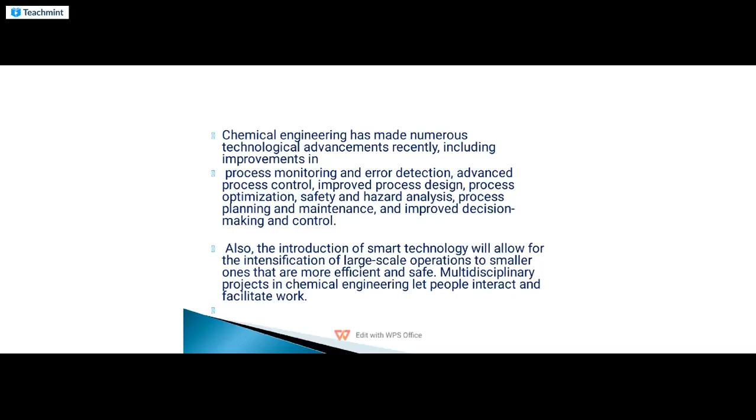We are describing new technology, like large scale operations, not only small scale, but also large scale operations with multi-disciplinary projects. There are a lot of advancements in today's technology - basic softwares like Aspen, Aspen Plus, DWSIM, CFD (Computational Fluid Dynamics), ChemCAD, which have more impact on the next generation, especially in chemical and process industry.

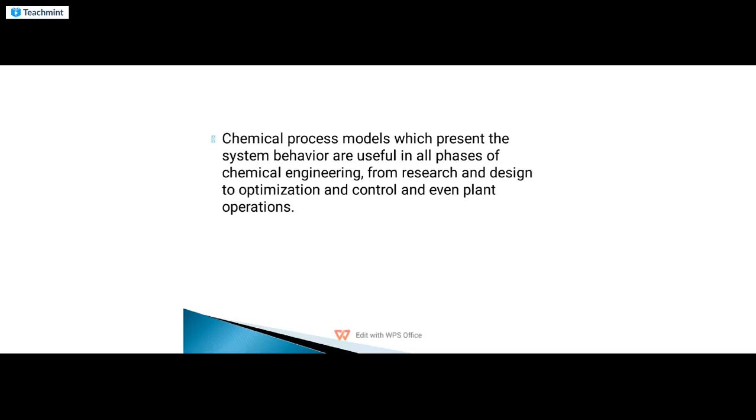So chemical process models also present the system behavior in all phases of chemical engineering, including research, design, optimization, control, and even plant operations.

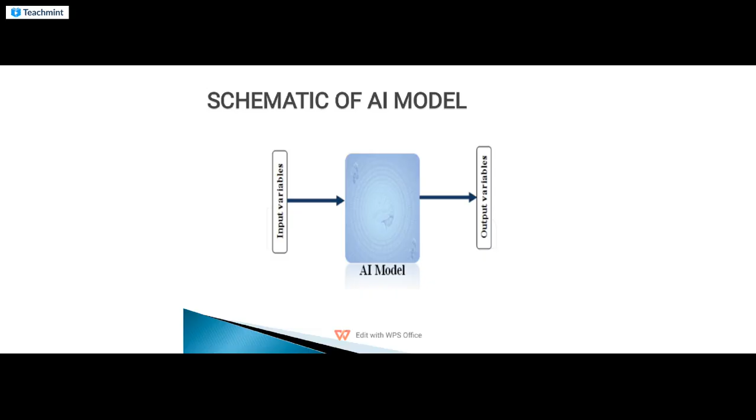Next, there are two types of modeling available in chemical engineering: mechanistic approach, and data-driven approaches like ANN (artificial neural network) and fuzzy logic models. In the mechanistic approach, the fundamentals are physical-chemical laws such as conservation laws, forming the basis of the model, with algebraic equations for mass, energy, and momentum balances. So we are discussing these types of modeling in chemical engineering.

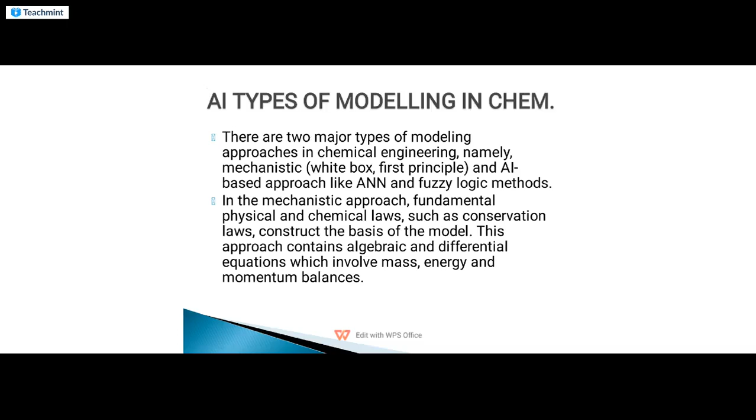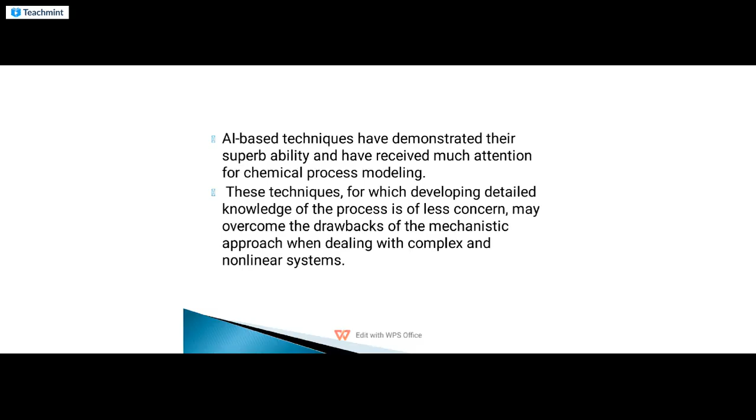The most common method in chemical engineering is ANN (artificial neural network) and fuzzy logic, which are sometimes hybridized with evolutionary algorithms. Apart from ANN, we have fuzzy logic methods and their hybrid schemes, which are network-based, like ANFIS - Adaptive Neuro-Fuzzy Inference System - implemented in the framework of adaptive networks, also applied for modeling purposes in chemical engineering.

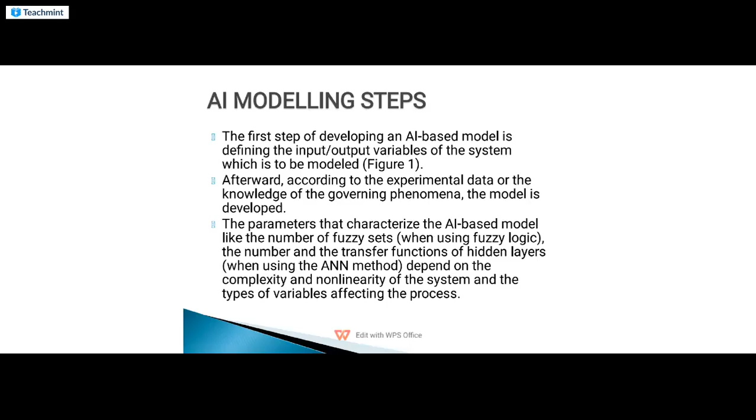The parameters characterizing a model, like fuzzy sets using fuzzy logic, and transfer functions, also depend on the complexity and non-linearity of the system, and the types of variables affecting the process. Among the types of ANN structures, the multi-layer perceptron (MLP) - a neural network with a feed-forward scheme - is used in the topology of system modeling.

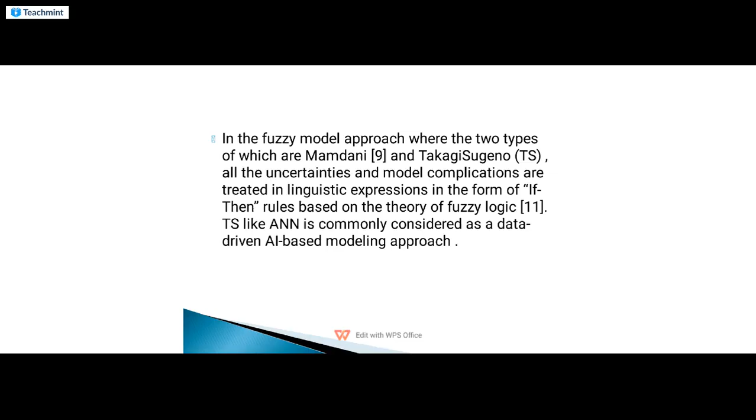So what is GA? Genetic algorithm. GAs can be used to optimize the performance of the fuzzy model. The use of GAs recognize the parameter estimation as well as the parameters of the scaling functions in the universe of discourse, or the MFs, membership functions.

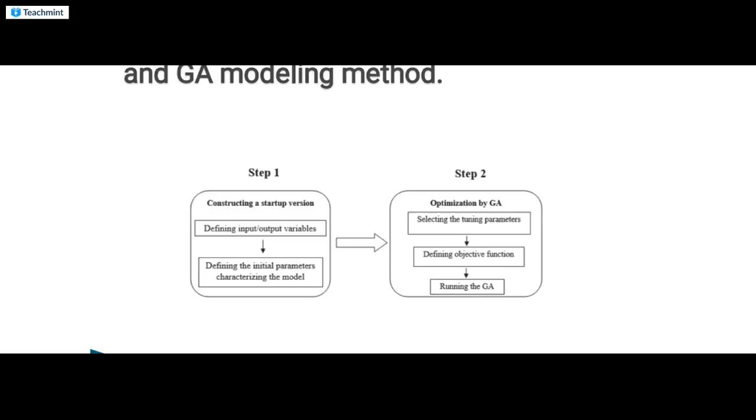So this is your schematic model. You can see the setup in the Mamdani fuzzy and GA modeling system, very clearly. Step 1, you see the different variables and also optimization by GA, and also defining all the input variables, the initial parameters of the model, and defining the objective function. So this is the schematic of fuzzy and GA method.

So the hybrid Mamdani modeling uses two types: constructing a startup version using heuristic knowledge, and second, the tuning procedure using GA. So now we can see the first step. We are not describing more, we are going step by step.

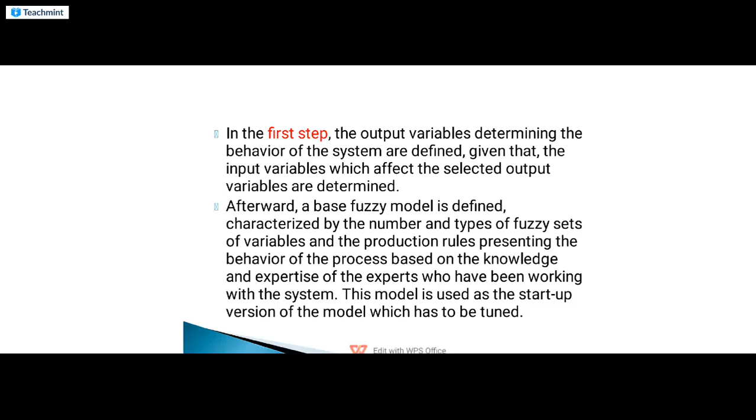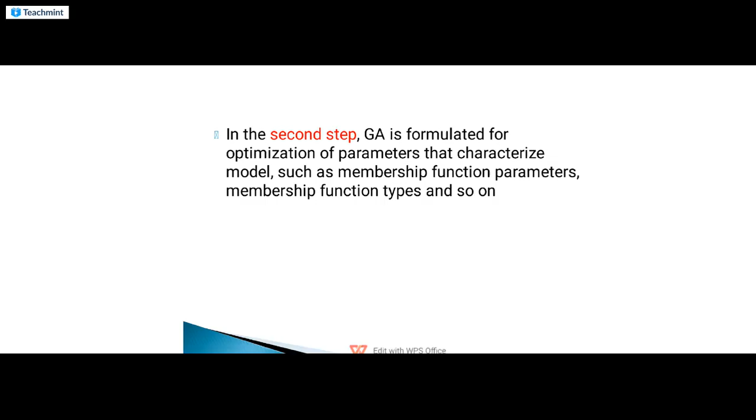So the second step, we are going to the GA formulation, optimizing parameters such as membership function parameters and membership function types. So what are the applications of AI optimization in chemical processes?

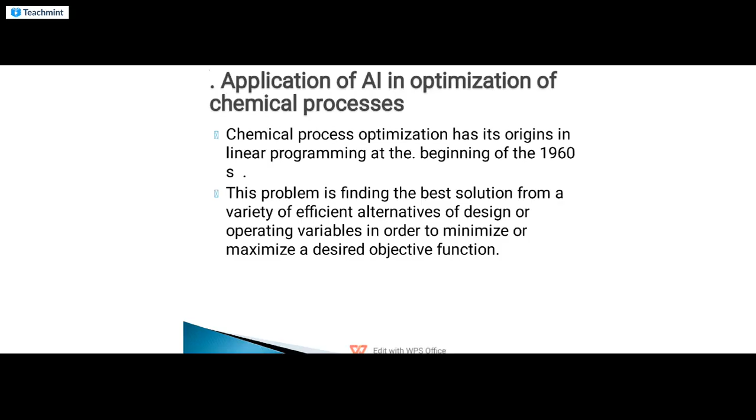This chemical process optimization has its origin in linear programming in the earlier years, the 1960s, and also defining the different operating variables in order to minimize or maximize the desired objective functions. So in general, the objective function can be minimization of operating cost and undesired material production, or maximization of energy efficiency, yield, operation productivity, profitability, safety, and reliability of the plants.

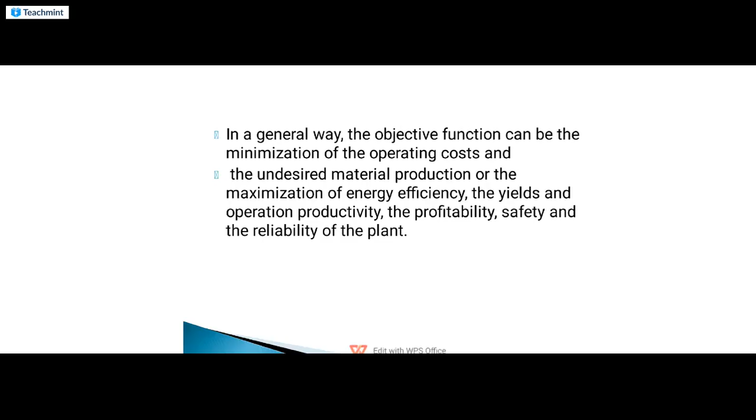Now, what are the chemical processes? The nonlinear and complex solutions through gradient-based optimization approaches. So we have EAs, evolutionary algorithms like GA, genetic algorithm, harmony search, particle swarm optimization, and other categorized AI-based methods in order to efficiently define the optimization of chemical processes.

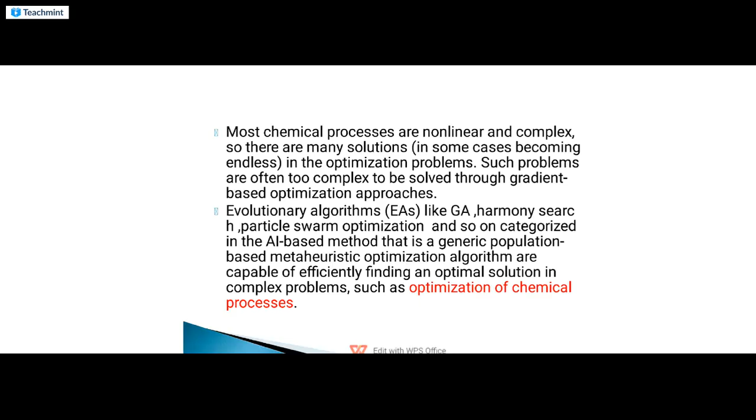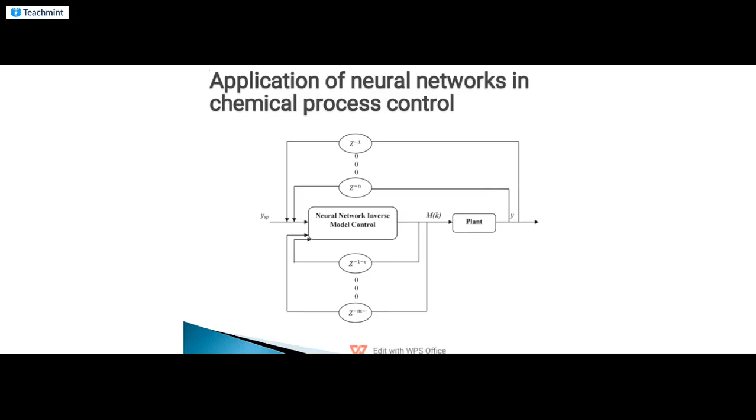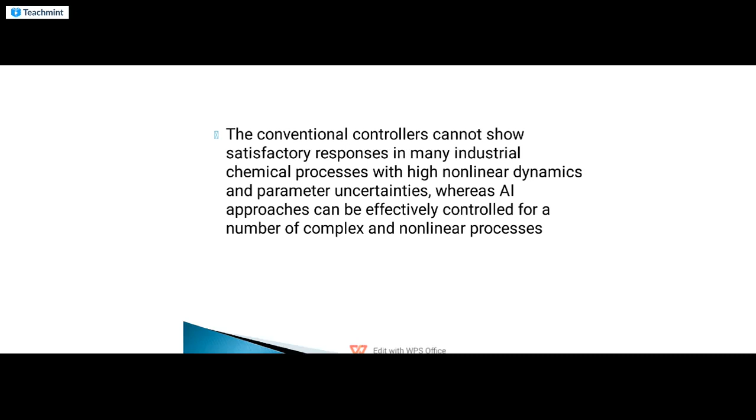Conventional controllers cannot show good satisfactory application in many industrial processes with nonlinearity because of high nonlinear dynamics and parameter uncertainties. But AI approaches can control very effectively for a number of complex and nonlinear processes, because of their high potential in handling nonlinear relationships and self-learning capabilities of neural networks in different chemical processes such as thermal process, reaction process, separation and purification process.

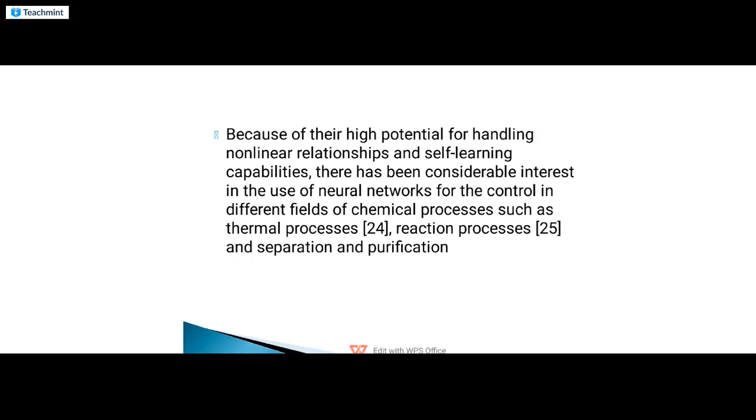So one of the algorithm-based neural networks is the inverse model control system. We can make use of these control variables. This is the manipulation of the different control variables and dynamic model, which you can check here.

The function of input and output is shown as phi applied to ysp, y(k-1) through y(k-n), M(k-1-tau) through M(k-m-tau). Where phi represents the function of the inverse model, k is the discrete time, and M, y and ysp are the control actions and the output of the plant and the set point controller respectively. Therefore, the controller predicts the control action, as shown in the previous diagram, for the state variables and past control actions.

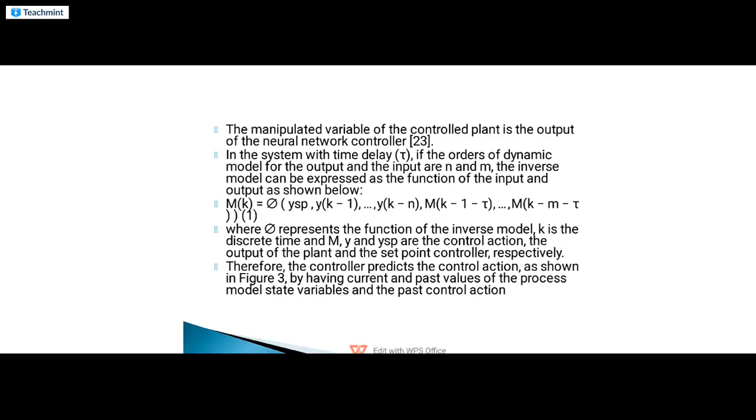Then we'll come back to fuzzy systems, which are used in different applications for chemical processes, and also fuzzy logic controls, and batch polymerization reactor and polymerization processes.

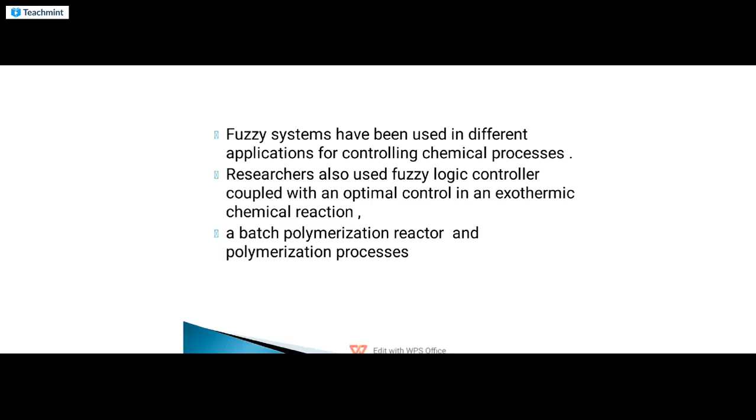So this is the architecture of the ANFIS model. Two fuzzy rules for two inputs and one output. Layer 1, layer 2, layer 3, layer 4, layer 5. We will see descriptively what these different layers are.

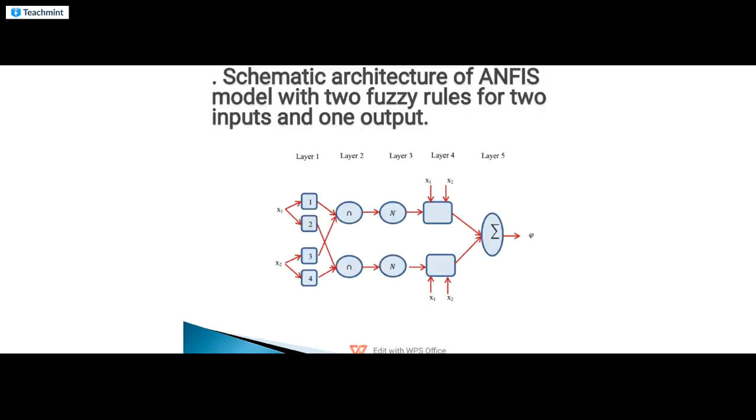The first layer is named the input layer, which gives the parameters of the membership function, etc., and varies between 0 and 1. The second layer is the neuron layer that performs connectivity operations and calculates the firing strength of the rule.

The third layer performs the normalization process by the neurons of the layer. The fourth layer is where the normalized firing strength is multiplied by a linear combination of the inputs, using the Takagi-Sugeno fuzzy rule to obtain the rules layer. Then the final, fifth layer, sums the outputs of the fourth layer. So this is the brief description.

In application of AI techniques in fault detection in chemical engineering, A failure can be described as malfunctions in the plant due to instrument failure, disturbances, abnormal conditions, and financial losses. So all these are monitored and used in applying AI techniques.

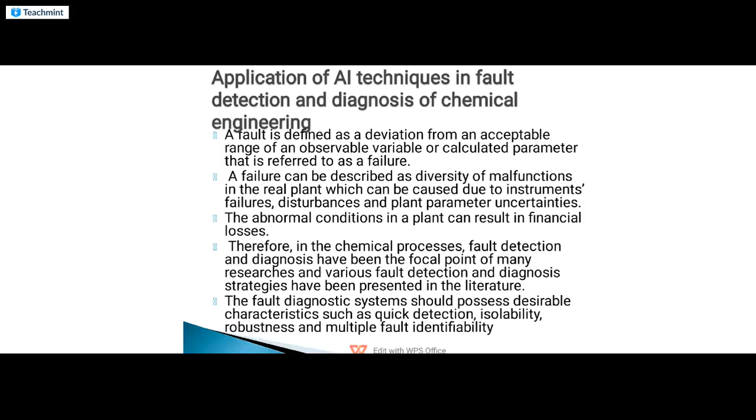This is the intelligent fault diagnosis technique, also used in the neural network system. In fault detection based on neural networks, the neurons in the input-output layers are equal to the number of measured variables and the number of potential faults in the process.

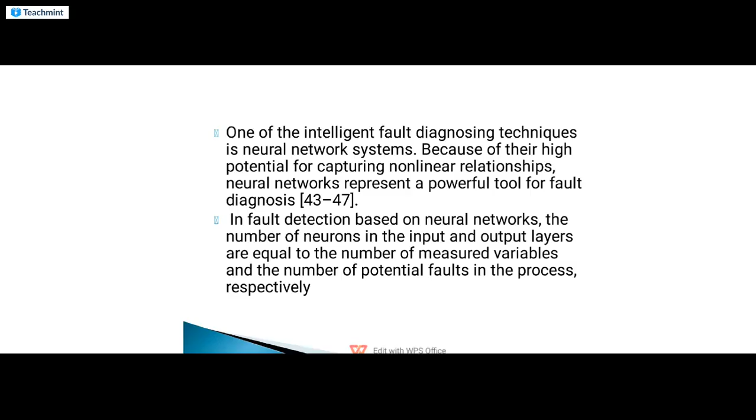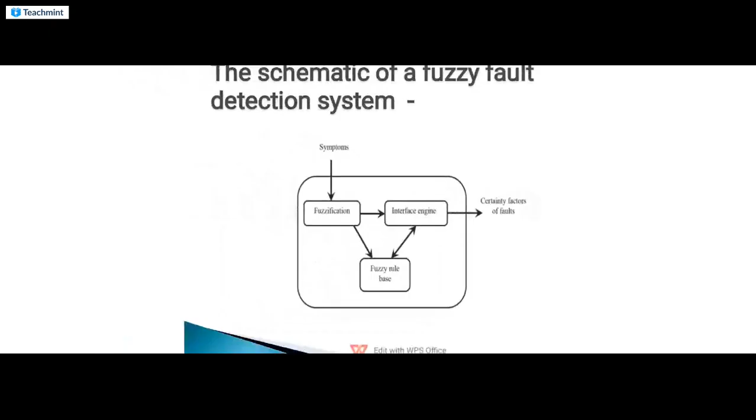This is a schematic of a fuzzy fault detection system: fuzzification, then the fuzzy rule, and finally the certainty factors of faults. So this is the schematic of fuzzy fault detection systems.

So we have seen the four illustration studies: modeling, optimization, control, fault detection, and the diagnosis of chemical processes.

The disadvantage of fuzzy diagnosis is that it is more heuristic and knowledge-based rule, and also very difficult and time-demanding, and sometimes impossible for plant-wide integration process. Therefore, neuro-fuzzy direct application in chemical plants are proposed.

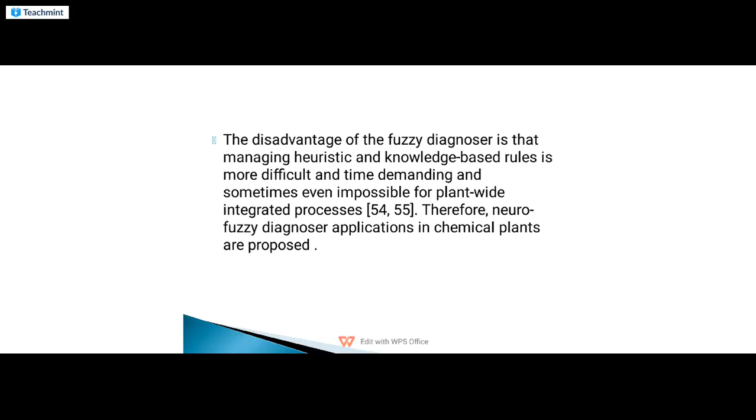Now coming back to the case study: removal of water in a microfiltration membrane-based hybrid Mamdani fuzzy GA. In this study, Mamdani fuzzy models are developed for removal prediction of two types of viruses from water. Here GA is also employed for the estimation of parameters, the membership function of the input-output variables.

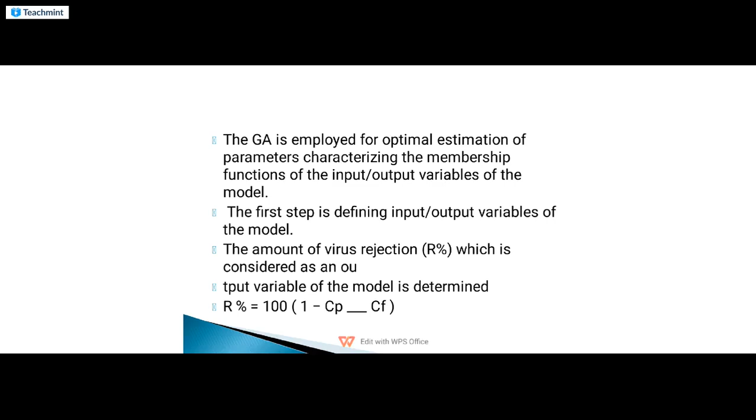The first step is defining the input-output variables of the model. The amount of virus rejection is considered as the output variable of the model, determined by this formula. The input variables of the model are concentration of the FMD virus and the IBR virus, the operating pressure, volume, and RPM stirring speed.

The next steps are setting up your fuzzy inference system using the fuzzy sets, etc. In this way, you are able to make the membership functions very well.

The second method involves a large number of variables in the model. In this method, the variables of the model and all rules are considered as the membership functions. This one is used for the optimization formulation of models.

This model is developed based on qualitative rules, bypassing the complexities and drawbacks of the white box modeling method, and comparing the accuracy, you get 90% for the developed fuzzy model.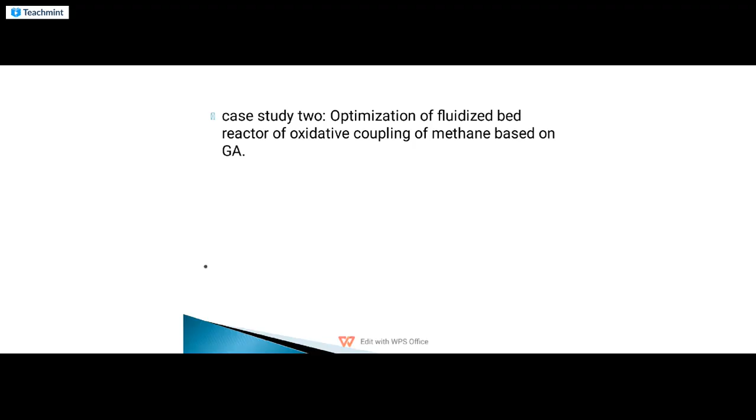So, optimization of fluidized bed reactor and oxidative coupling of methane based on GA. In this study, there is optimization of C2, ethane and ethylene, and the coupling of methane over the manganese, Na2WO4, and SiO2 catalyst in a fluidized bed reactor.

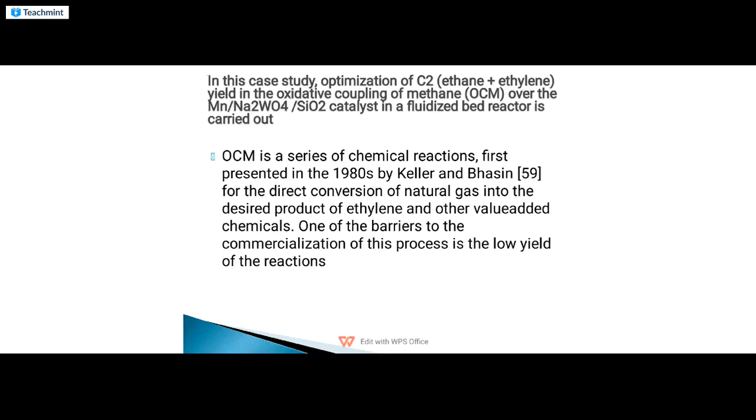It's a series of chemical reactions with desired products of ethylene and other value-added chemicals, using a fluidized bed reactor. Various solutions have been proposed for yield improvement, and one possibility to improve the C2 yield is stage-wise feeding configuration along the reactor.

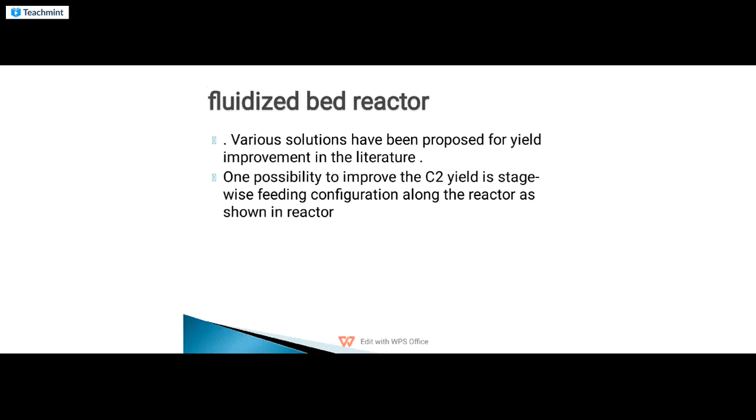You can see section 1, section 2, section 3, section 4 feeding as per the section of the reactor, you can check it here. Not the full feed, but section-wise feeding.

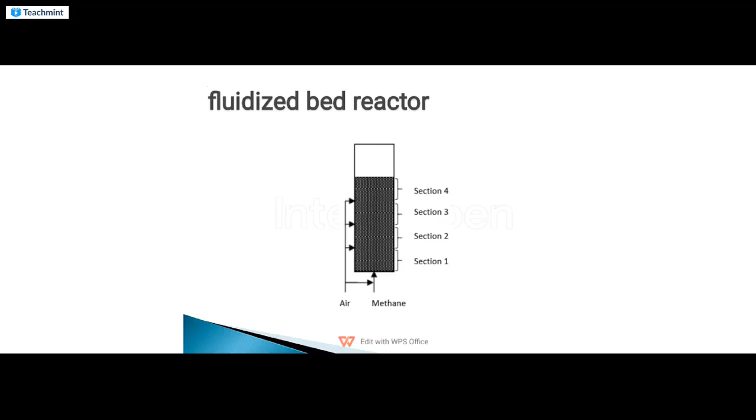In this case, you can see the many process variables that enhance the C2 yield which are listed, and the main GA parameters are presented, and the best results are achieved in the reactor. The optimized C2 yield achieved by the AI-based method is 4% higher than the original modeling.

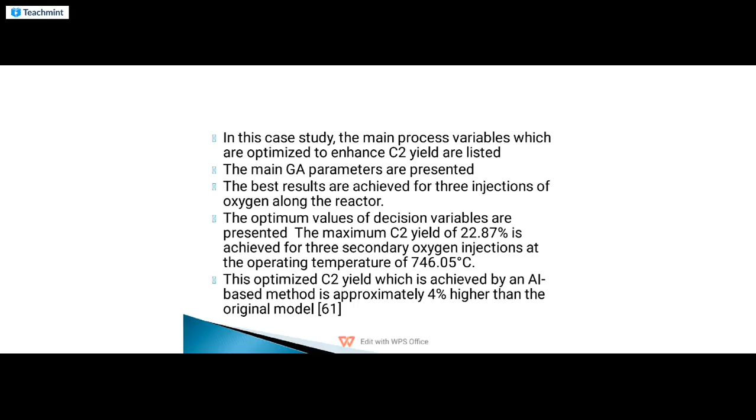Conclusion: AI techniques provide tools to tackle complex problems, challenging and useful applications of AI introduced in chemical engineering processes. We have studied four illustrative case studies discussed here. From this discussion, the ability of AI techniques has been revealed across a wide range of fields in chemical processes.

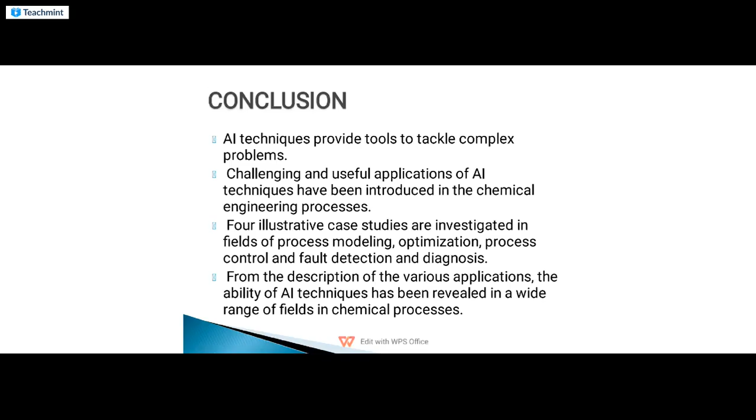Now let's come to the application of AI in petroleum engineering. Here also the same techniques and applications apply, but the area is different: the oil and gas industry with multi-phase flows.

As shown in the literature, artificial neural network, fuzzy logic, and genetic algorithm are the most popular tools used in this area. In basic techniques between 1989 and 2004, a significant number of research studies were carried out using AI tools in the oil and gas industry.

Hybrid systems have increased in popularity, and hybrid intelligent systems (HIS) are used for the complex multi-phase process in the oil and gas well because of solid, liquid, and gas flows, and also computational intelligent components such as machine learning, fuzzy logic, neural networks, and genetic algorithms. These technologies, combining fuzzy logic, neural network, GA, and expert systems, provide effective problem solving in different applications.

In petroleum engineering, we have interface development of simulators, well log interpretation, drill bit diagnosis, pump operation diagnosis, well test model selection and interpretation, hydraulic fracturing, and gas lifting.

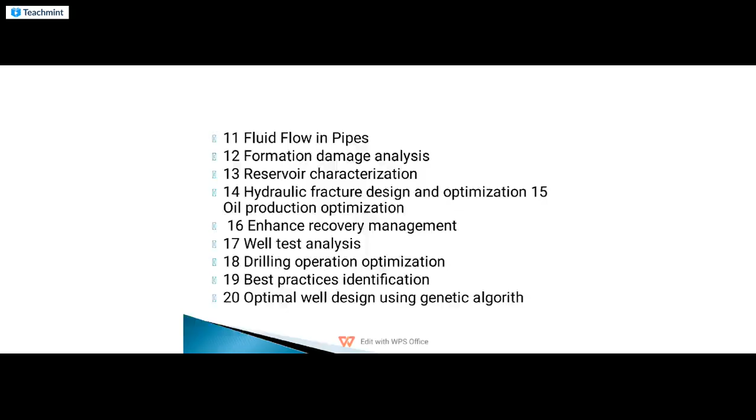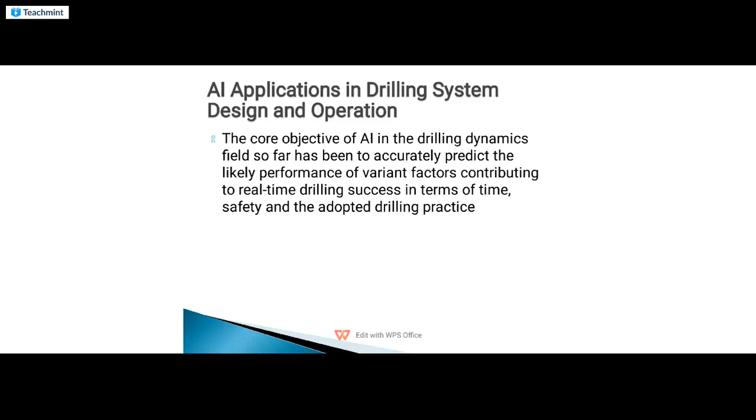Application: drilling system design operation. This is the core objective of AI drilling dynamics, which has been to accurately predict the performance of the varied factors contributing to the drilling process, the safety, and adopted drilling practice. Here we are detecting the complexity of the operations, downhole pressure, temperature, etc., which are misleading the driller about the actual downhole situations, which are managed by this process.

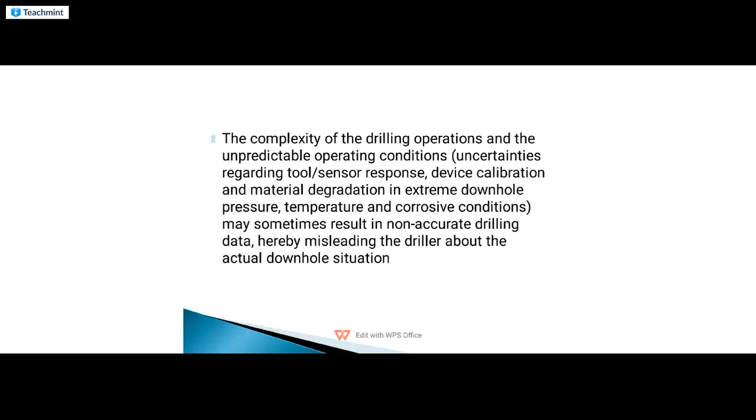So, in the on-field success of AI hydrocarbon drilling, and the subsequent interest of the industry, experts direct AI techniques to adapt and improvise the drilling situation with complex and non-linear control parameters.

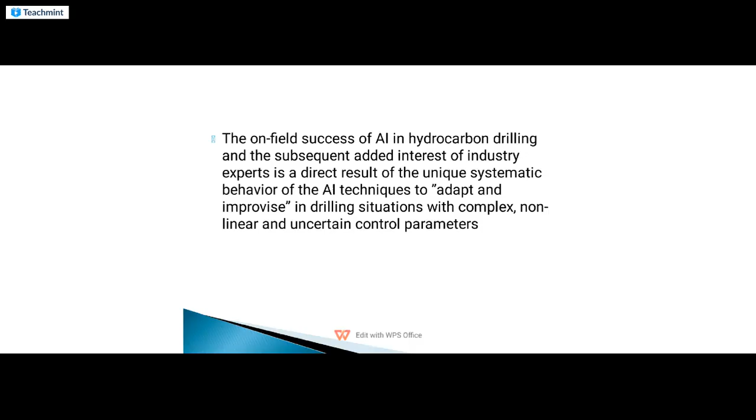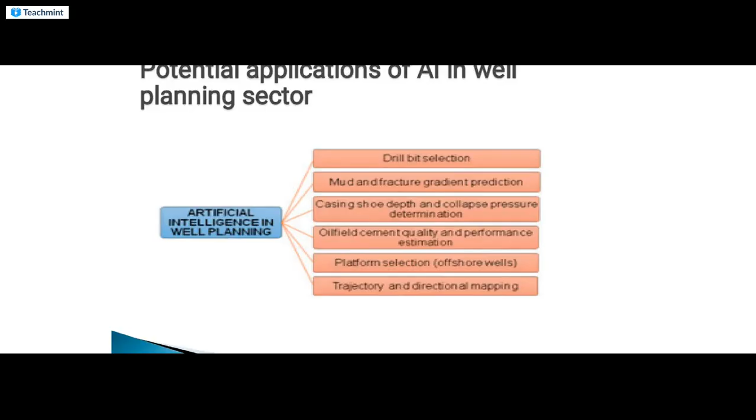So these are the applications of AI in well planning: drill bit selection, mud, fracture gradient prediction, casing shoe depth, oil field cementing, platform selection in offshore wells, and trajectory and directional mapping. These are the potential applications of AI in the well planning sector.

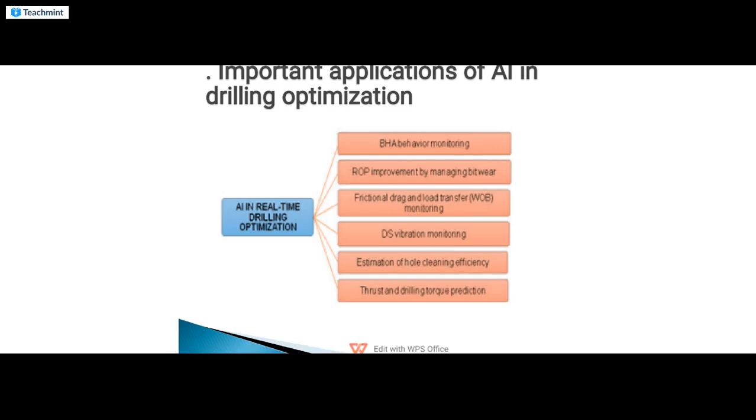Important AI applications in drilling optimization: BHA, bottom hole assembly, and ROP, rate of penetration, frictional drag, and weight on bit. We also have DS vibration monitoring estimates, hole cleaning efficiency, and thrust prediction.

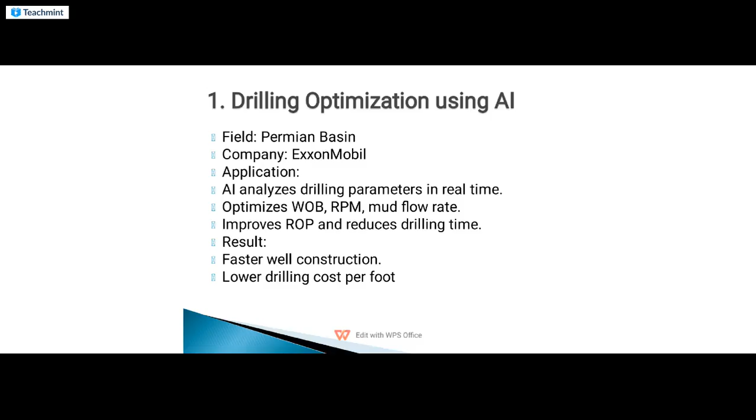Drilling optimization using AI. Exxon Mobil is analyzing optimization of weight on bit, RPM, rate of penetration, for faster well construction and lowering drill cost. Case study: AI-assisted optimization in the Permian Basin, controlling high drilling costs with AI inputs like weight on bit, RPM, mud flow rate, formation data, etc., to reduce drilling cost per well.

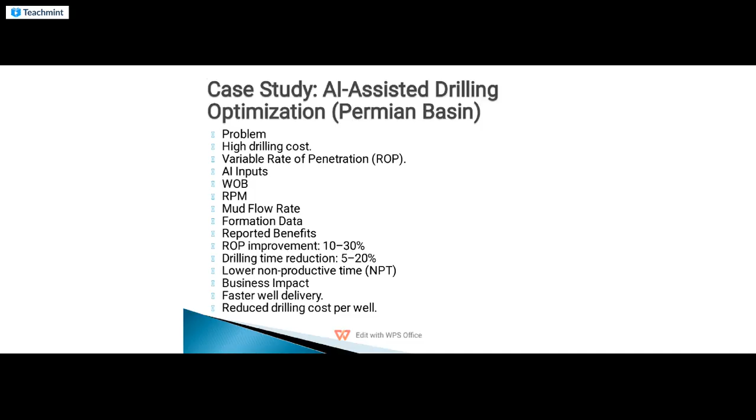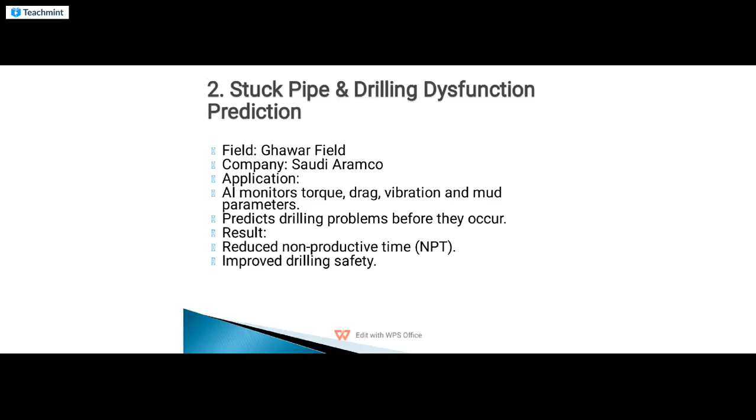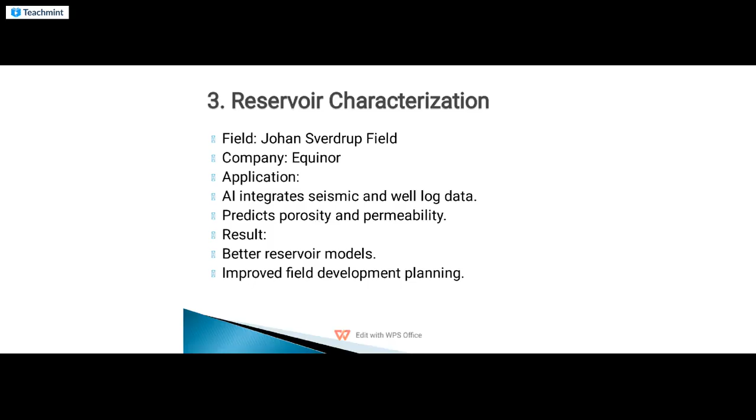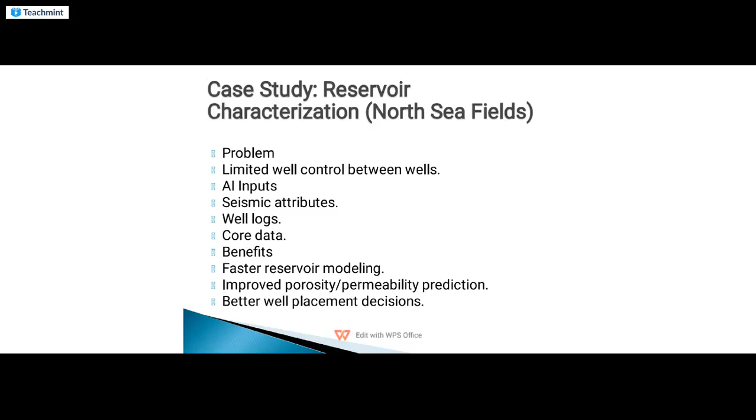Next is reservoir characterization. Field: Johan Sverdrup field, Equinor application. AI integrates seismic and well logging data for predicting porosity and permeability, better reservoir models, improved field development and planning. Case study: reservoir characterization in North Sea offshore oil fields. AI inputs: seismic attributes, well logs, core data. Benefits: faster reservoir modeling, improved porosity and permeability, and better well placement decisions.

Production forecasting. Field: Kashagan field. AI forecasts future oil production, resulting in better production planning and more accurate reserve management.

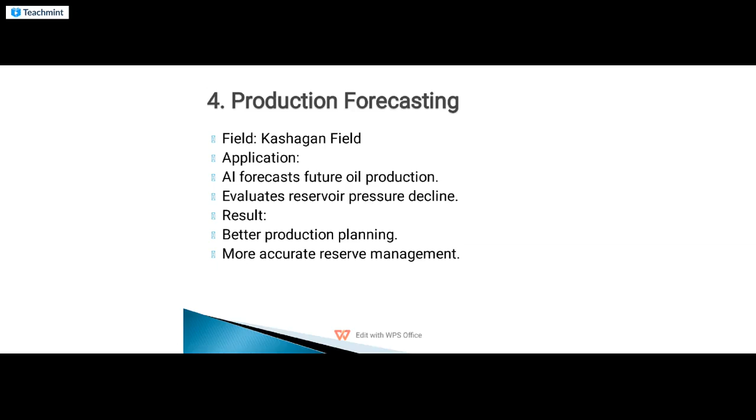Next is ESP, electrical submersible pump failure prediction, predicting unexpected pump failures using AI inputs: motor current, intake pressure, temperature, vibration. Benefits: failure prediction days or weeks in advance, and increased equipment availability.

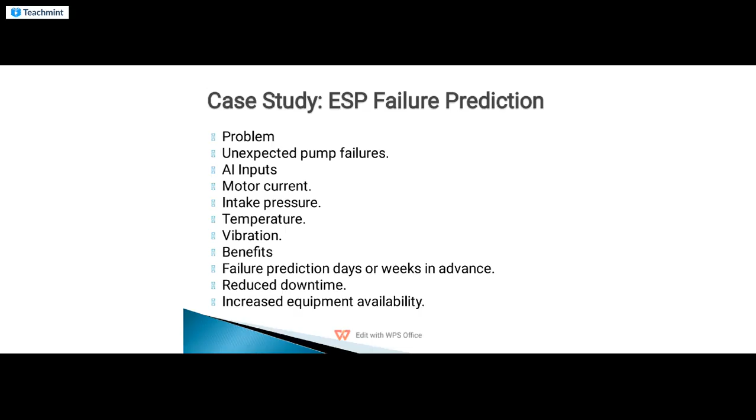Then artificial lift optimization, Bakken formation. AI monitors ESP performance, predicting pump failures, resulting in reduced downtime and increased production.

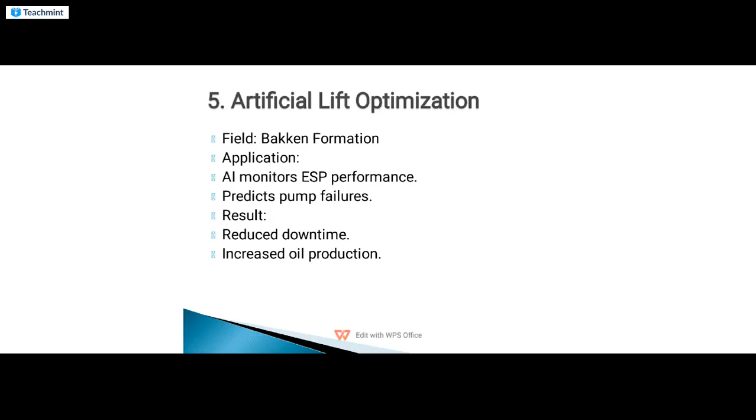Then predictive maintenance. Gulf of Mexico offshore fields, companies Shell and BP. AI monitors compressors, pumps, and turbines, detecting abnormal vibration patterns. Result: prevents unexpected shutdowns, saves millions of dollars in maintenance costs.

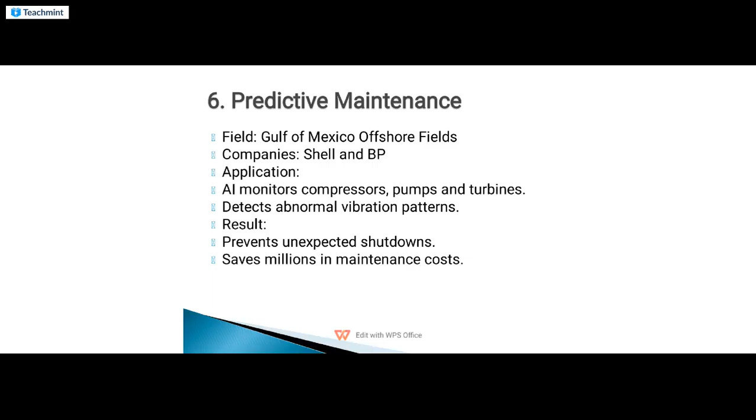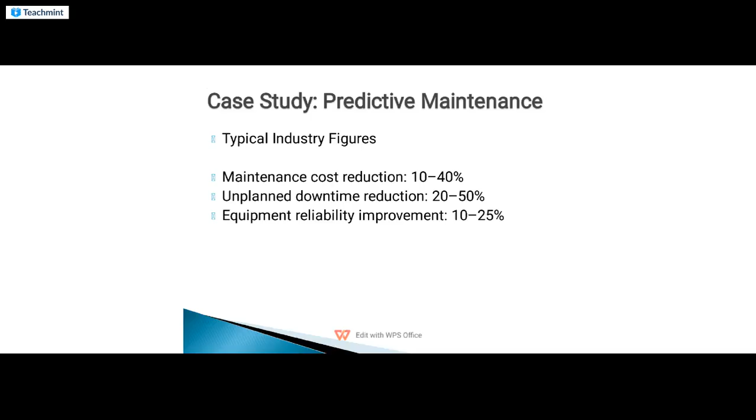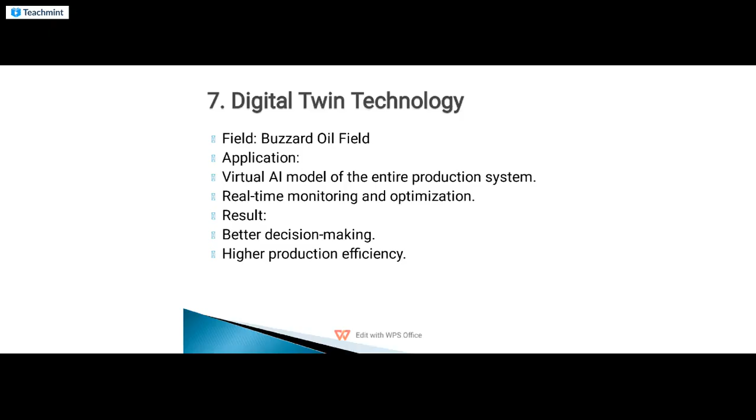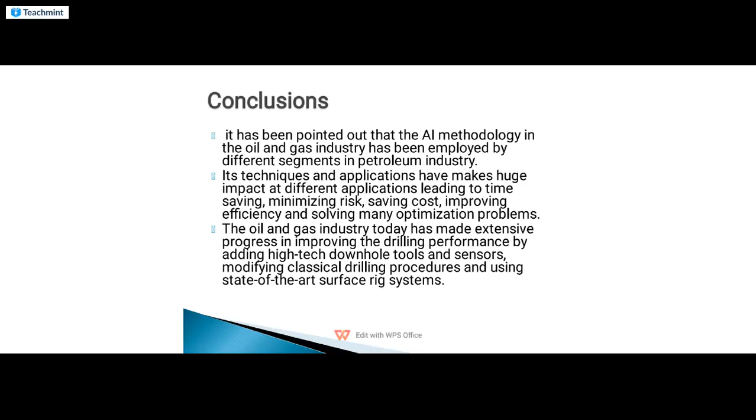So, conclusion: we have come to the end. AI has been employed by different segments in the petroleum industry, and these applications have made a huge impact, leading to time saving, minimizing risk, saving cost, improving efficiency, solving many optimization problems, and extensive progress in improving drilling performance, using high-tech downhole tools and sensors, modifying classical drilling procedures with state-of-the-art surface rig systems. So that is our conclusion, and thank you.